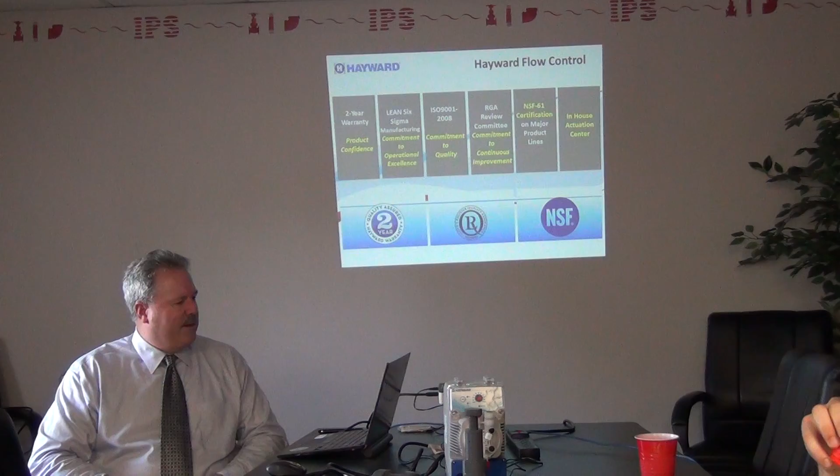We do Lean Six Sigma manufacturing, and if you've ever been involved or heard about that, it's basically all continuous improvement. It's always ways to improve your processes. We're ISO 9001 certified. If there is an RGA, something goes out wrong, it gets reviewed. Why did it come back? If it was a problem because of the product itself, then we try to figure out what happened and try to improve it. And we have a pretty lengthy process. Six Sigma is a very lengthy process.

I've been involved in the actual manufacturing of a new product. A new product takes years to develop, because we actually go back to input from the end user, engineers, and then we put all the stuff out there. All the competitors, we ask, what do you like about the stuff, what don't you like about it, and that's how we actually start making our new products.

We don't just decide, I think if we do this, it's going to be better. We actually go out in the field and try to find out, what are the customers looking for? What are the engineers looking for? Because they're obviously the ones specifying the product. So we want to make sure that we're basically scratching where they're itching. A lot of our products are NSF 61 certified.

Potable water, every once in a while you might run into that. Somebody says, is it NSF approved? Well, actually, if you open up our industrial product guide, it shows which items are NSF approved right in the second page. But you can call me up, I'll let you know.

And then we have our own in-house actuation, and I'll show one of the actuators we have here. Anybody sold actuation of any type in the past? Mm-hmm. Okay. Whose actuation do you guys sell currently? On the PVC, we're really not stuck to anybody right now. Okay. Most everybody uses somebody else's actuator. Nobody really is making their own actuator themselves. They buy it from another manufacturer, and they basically adapt it to their valves.

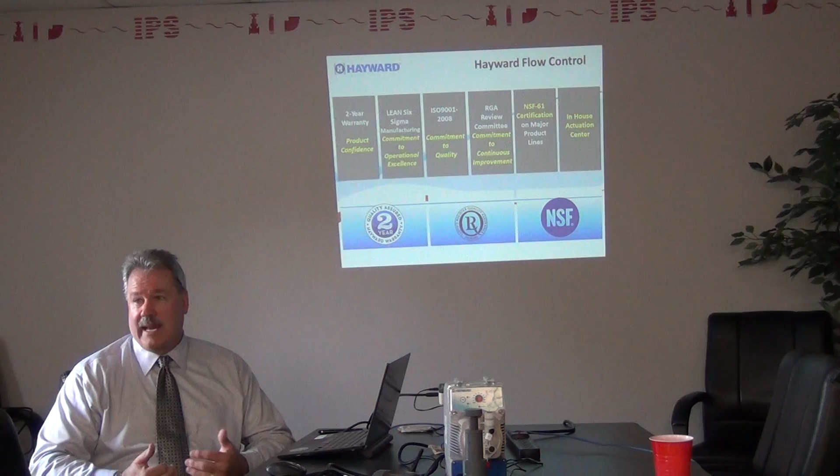And we're no different. We buy them out, except we do have a pneumatic line that actually is our own in-house actuation, but most everything else is bought out. Is that ASCO that usually does it for you guys? No, actually, there's a company called Promation that is one of our actuators, an electric actuator. We have a company called Habonim, which is an Israeli manufacturer. We use their actuators and build them at our place. They're great actuators. So those are the two primary ones: the Promation line and the Habonim line.

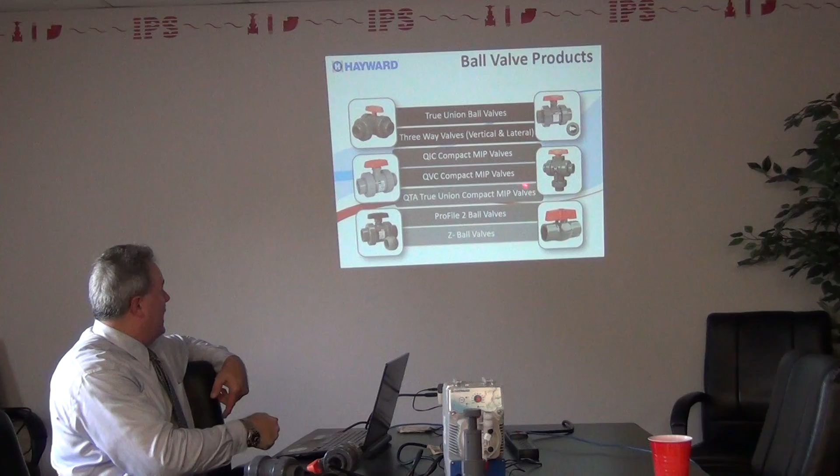Okay, you're probably all familiar with the ball valves here. Before I get into that, we have these two items here, this QVC and the QTA. If you're not familiar with that series, those are the only few that are actually made offshore. Because we have to compete sometimes with people that are bringing stuff in from overseas, or you guys have to compete with people that are bringing things from overseas. And they need a very, very cheap valve.

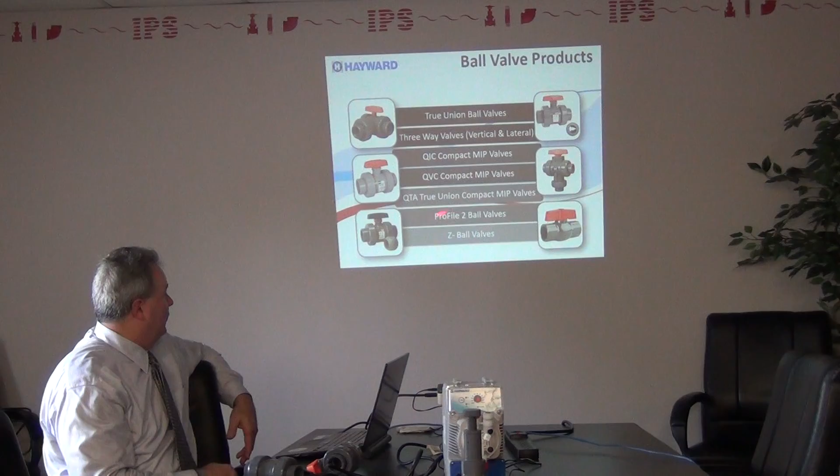Now that's not something I want to try to sell or promote, but you guys need to be aware of it. We actually do have a very inexpensive product line for those people that are using it for water. I wouldn't use it for chemicals or things like that, but if somebody's got an irrigation line and they just need something really cheap, that's where you can go. Those two series right there. Outside of that, everything else is made in the United States.

Our proportional control, this is called a Profile 2. The difference in this valve versus your regular true union ball valve is this profiled ball inside there. A lot of times people have to use a needle valve or a diaphragm valve to turn things down to get a fine flow. This allows somebody to do this, but with a quarter turn valve.

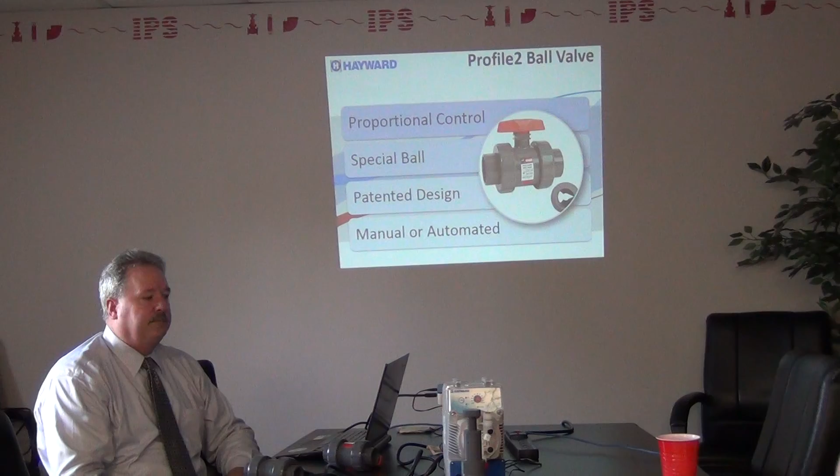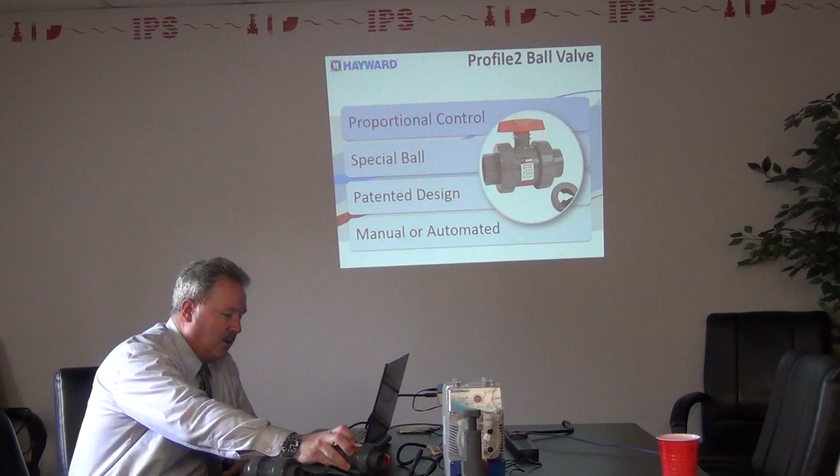So when you go to actuation, if somebody wants to actuate a diaphragm valve, you have to get this multi-turn actuator. It's like $10,000 just for the actuator itself. So this is a lot less expensive, and if they don't need really super fine control, these valves actually work very nicely for those applications. What size is that? It goes to 2-inch. Is it like a V port almost? Yeah, you can see it's right there. That's what it looks like. So again, just like these valves here, the only thing that's different is the ball itself.

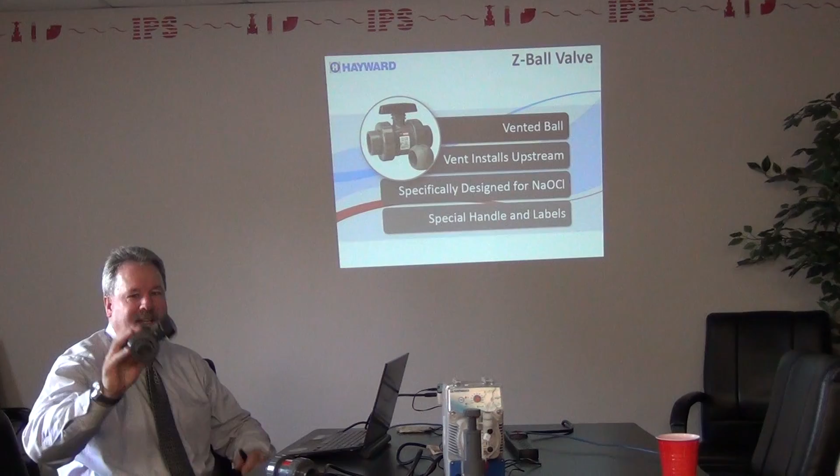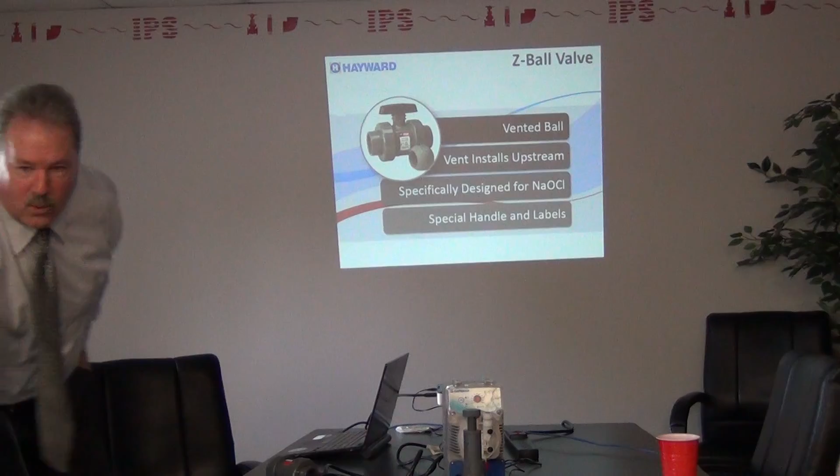Now this is the same valve as this, with the exception that it's got a different colored handle. And the reason why is because of that little hole. You can't really see it very well, but there's a hole that's drilled, and if you pass it around, you can see that hole in there. That hole is for people using sodium hypochlorite bleach applications. Anybody that's using bleach should be using that valve.

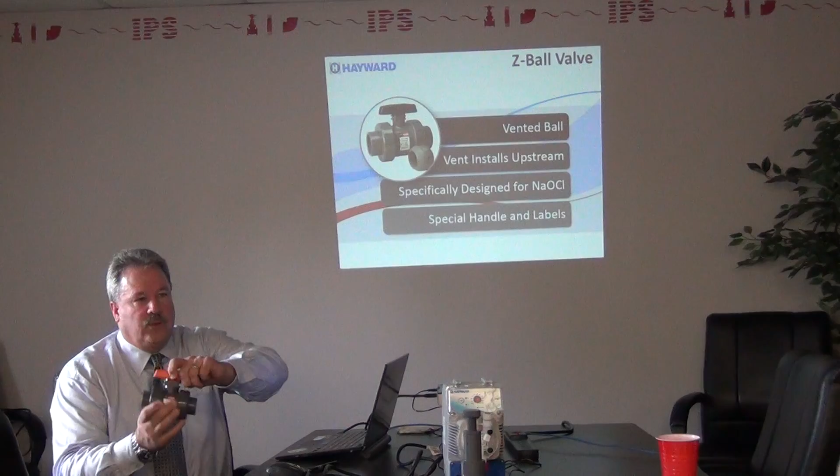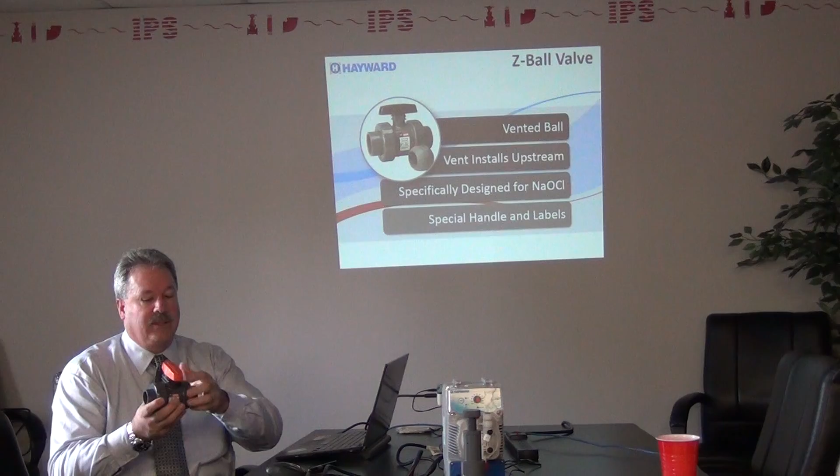They shouldn't be using a regular ball valve, because the problem with a regular ball valve is that if you close the valve and let it sit there for a period of time, especially if it's hot outside, it outgasses, and then you can't turn that handle. People end up breaking the handles. They basically have to take the whole ball out and shut down their line and everything. That hole allows enough room so that won't happen.

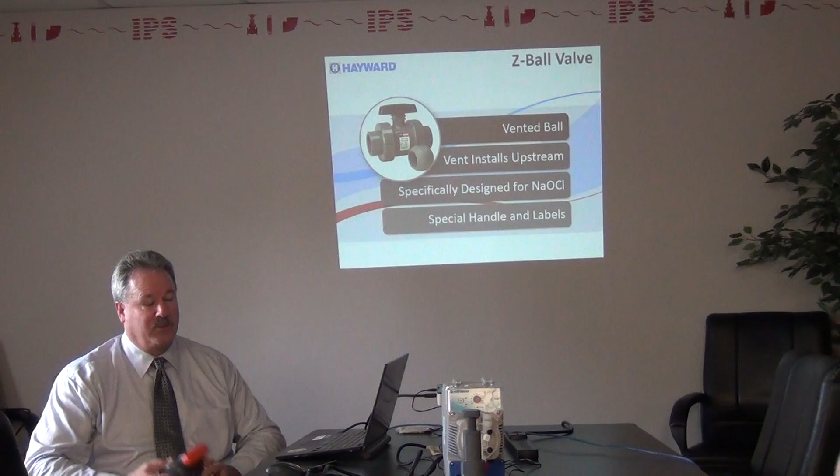So we sell a lot of those to wastewater treatment plants that are being built today. Along with our basket strainers, that's probably the second biggest thing we're selling, for sodium hypochlorite applications. And this is one of those profile valves right there.

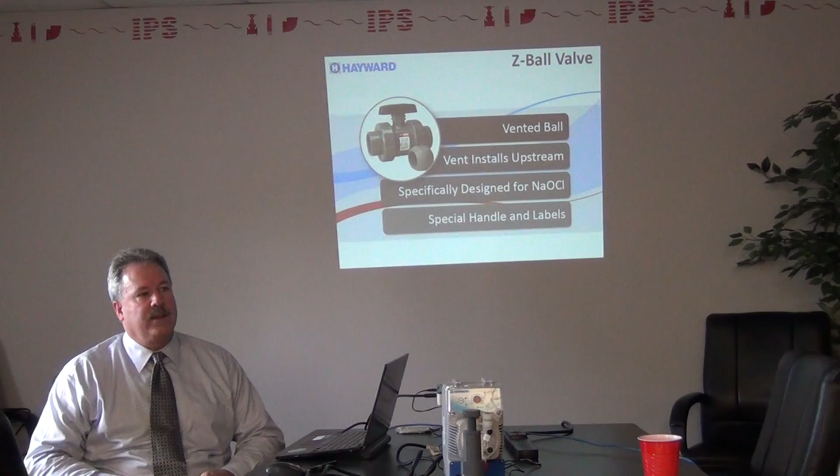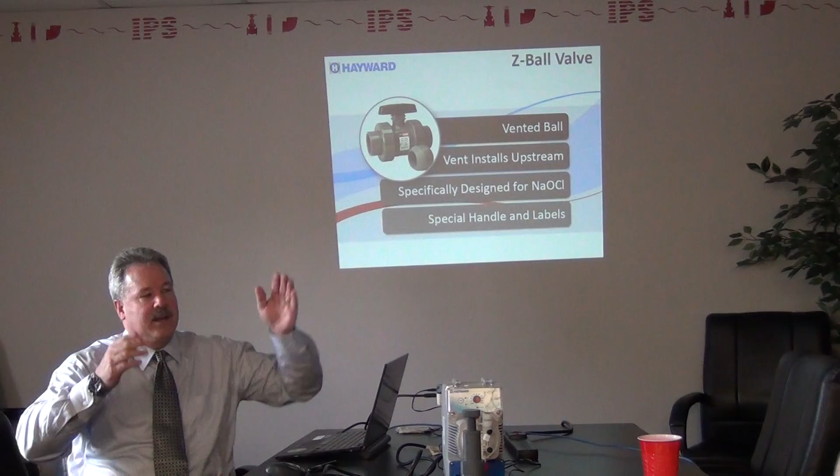So the Profile 2 has the V port, and the Z has the vent. Exactly. It's just got the drilled ball. In essence, that true union ball valve becomes a one-way ball valve, because you should always have that drilled ball on the upstream side of wherever your liquid is being closed down on. So if you've got a tank here and your valve's here, that ball should be on this side of it, so that it always has that ability when you shut that valve off that the outgassing will be on.

And one of the biggest problems I've seen is people putting them in backwards. They'll go, oh, this valve isn't working right. I'm having this leaking through problem. I'm going, you got it turned around the wrong direction. So. Close it.

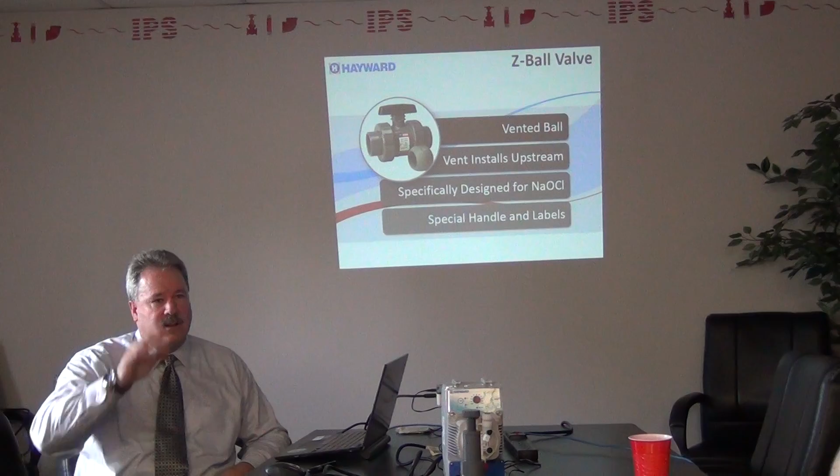And that's another nice thing about that valve is that with the vented valves you can see that. I mean, you walk through a line, you can see the guy's got a vented valve. There are other people, Asahi for instance, they'll drill a ball, but they don't show it. You can't tell the vented one from a non-vented one. The handles are the same, everything's the same. They just drill the ball.

Butterfly valves, I won't get into this. Again, this could be a whole separate meeting, but we have a new butterfly valve that's been out for about 1.5 years. It's called our BYV. It replaces our BY valve. We still have the BY available, but it's being phased out just because this valve is a much better valve. Again, went back to the engineers, the end users, developed this. Real quickly, the key points on this thing are that it's got ISO 5211 mount on the top, so somebody could use their own actuators and actuate this valve if they wanted.

Almost everybody's valves nowadays are going to this ISO 5211 style mounting, so they can use their own actuators. This has 19 positions it can stop. Most butterfly valves have 9 or 10. This has 19. You can lock it out, you can tag it out. It's actually an excellent valve. And another time I'll go through the pluses of this thing over the competition.

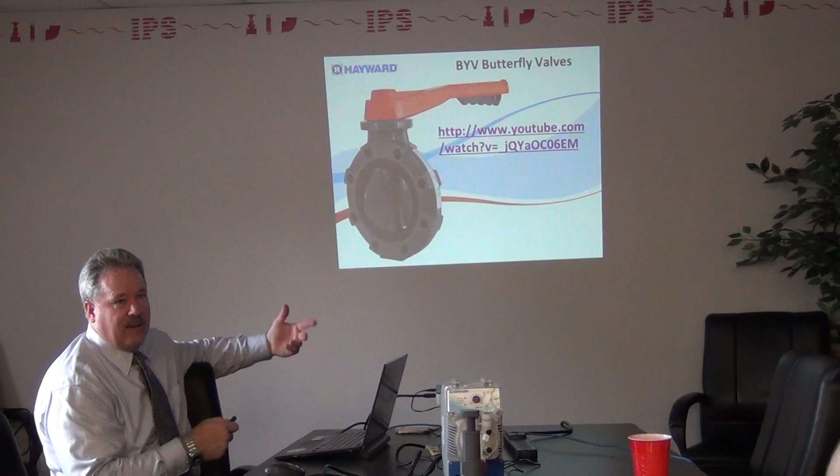The other thing it has is places, like everybody pretty much tags their valves. There's holes right here where somebody can put their tags to. That's where you put a lock or, just think about a cable tie. A metal cable tie goes through that so that people can't move it if they get it in the position they want.

Okay, unique to us is some of these products right here. We got our pressure relief valves, which are these. There's a little plug on the end, and in that plug, you don't have to use a gauge, but a lot of times people will put a gauge in there so they can basically set it to what they want. Problem with most other people's pressure relief valves, they have to put a T and then put a gauge. That's actually built into it. That's pretty cool. Yeah, and so it regulates everything that's upstream. That's what a pressure relief valve does.

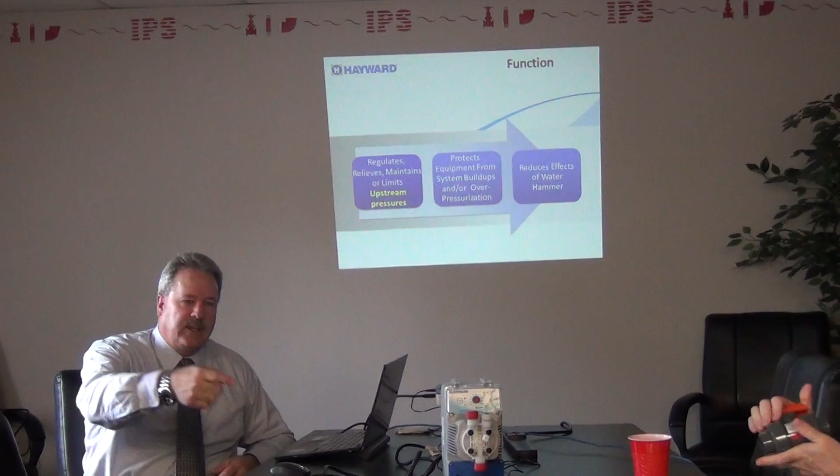Conversely, your regulator, think of it as the stuff in your house. You're trying to protect all your sinks and the faucets in the house. That's what a regulator is for, everything downstream. So that's okay for continuous bypass? The relief valve, yes. And that's called a lot of different things. Bypass valve, pressure bypass valve. I've heard a lot of different things. That one almost has 5 different names, whereas the regulator is a regulator.

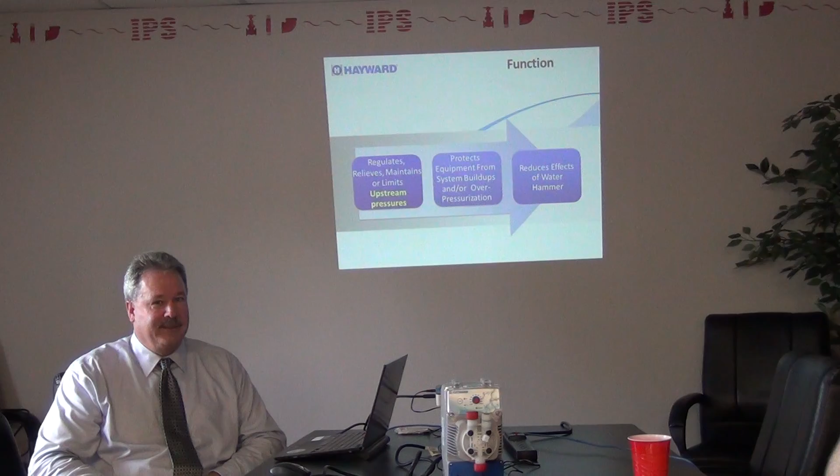Now, is that good for different pressures, there's different springs? Yeah, in fact, let me just do something here. I cut a lot of slides out of there. We'll push the springs. Okay. Oh, I'll just do this.

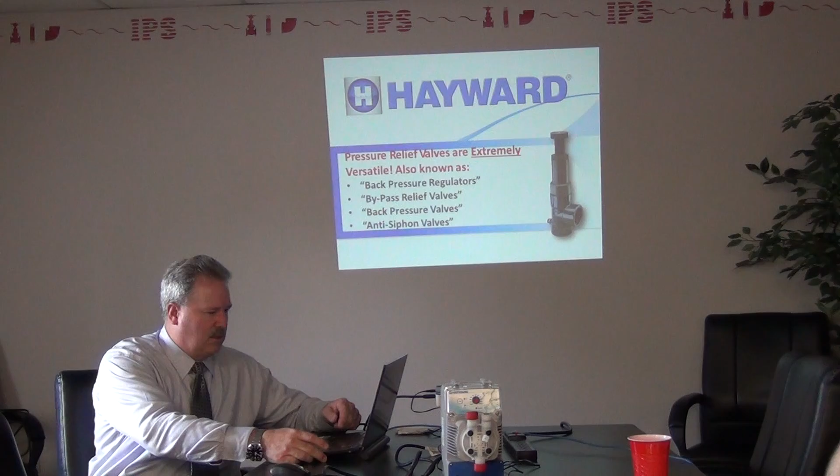It's known as back pressure regulator, bypass relief valve, back pressure valve, anti-siphon valve. A relief valve is known by a lot of different names. But to answer your question, oh, I guess it doesn't have it. Anyway, yes, it has different springs for your regulator. From like 0 to 10. Yeah, exactly. For your low side or your high side.

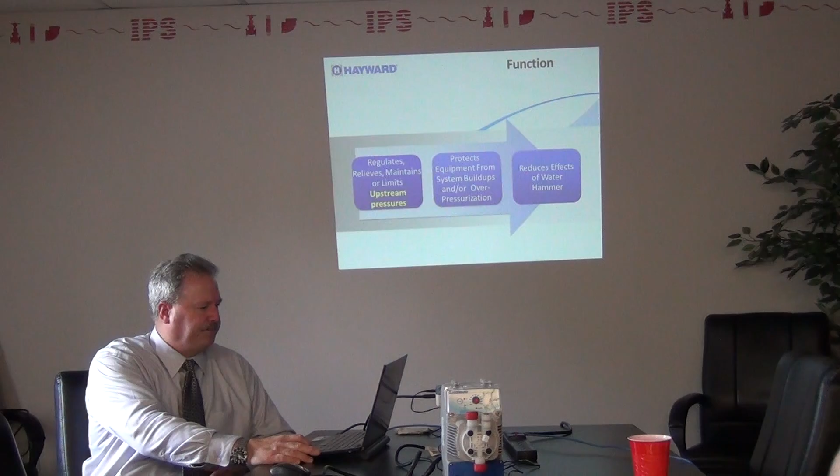And again, we can talk about different applications. I got all sorts of slides on different applications for these things in case you guys ever wanted to talk about that more specifically. Regulators, same thing.

All right, now the solenoid valve. You guys might have ASCO or somebody else like that, but this is our solenoid valve. That actually comes in really handy when you're using a chemical. Not for water. People using water, you may as well use a brass valve or something like that. But if somebody has a chemical of some sort, and we sell a lot of those solenoid valves, I was very surprised to learn how many Hayward does sell of those. And in my area, we sell a lot of them as well. It's just quick on-off. It's just instantaneous on, instantaneous off. It comes in 120 volt, 24 volt, 12 volt. You can get different coils for it.

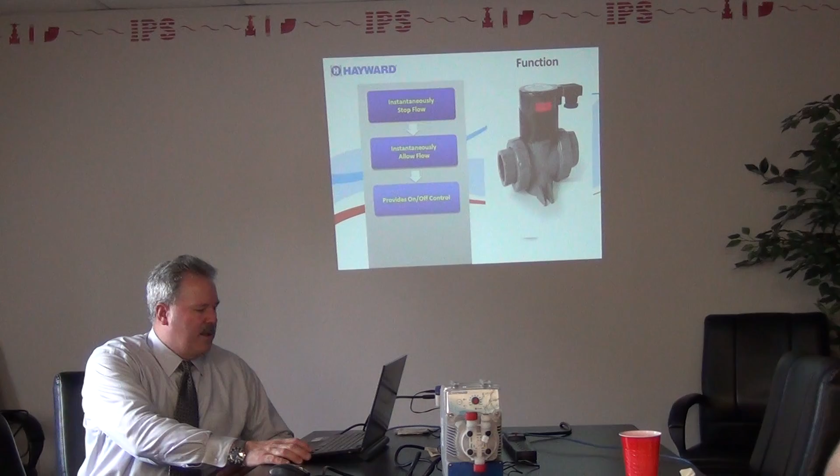Can you use those in chlorinated water applications? It depends. Is it mostly water with a little bit of chlorine, or is it almost all chlorine? Do you know? No. Okay. But yeah, they have been used in them. We have CPVC and PVC, so I'd probably be using the CPVC if I was in that application.

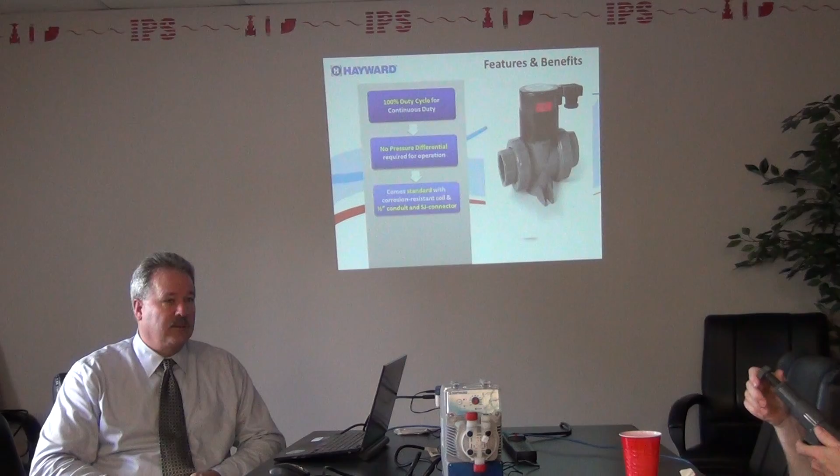Okay. Something else I'll just make mention of. You mentioned the basket strainers. That's our SB series. We also have our duplex, and that's used a lot in the water treatment areas. But we have lateral 3-way ball valves. The regular type have the bottom ports down here. The laterals are out to the side. It's like a T that's turned sideways. So it's a good valve. We sell a lot of those.

LHB series. That's basically an actuator that goes on top of your valve. Like you can take the handle off this, put the actuator on top, but it's a manual. You put the handle on top of that and turn it, and when it turns, it sends a signal to a computer to say that valve's either open or closed. So somebody that might not need an electric actuator or pneumatic actuator, but just needs to know whether a valve is open or closed, this works on both a butterfly valve and a ball valve.

And we sell a lot of those as well. Because every once in a while you run into situations where the guy goes, I don't need an actuator, but I need to know whether that thing's open or closed. I don't want to have to send a guy out there to find out if it's open or closed.

Yeah. And then we have the wafer check valve, which is, where did it go? Right for you, Lisa, that one. That's also a newer product. We have ball check valves, and then this wafer check valve, you can get with a spring or without a spring, but basically it takes up less space if it needs to go between flanges. It's another product.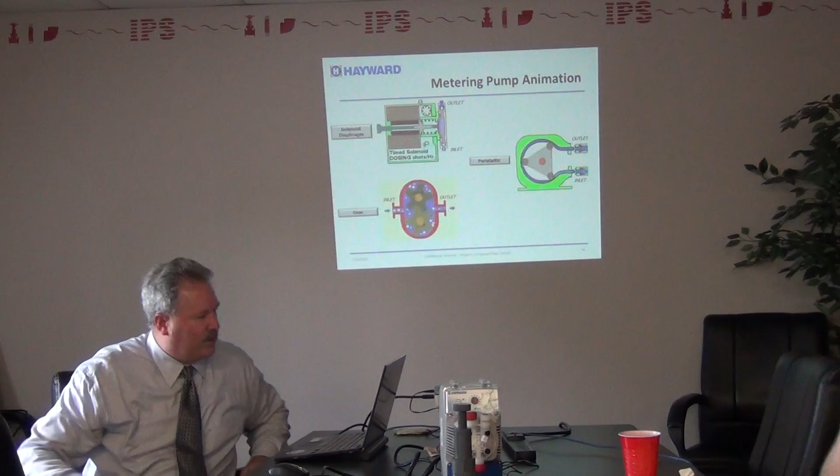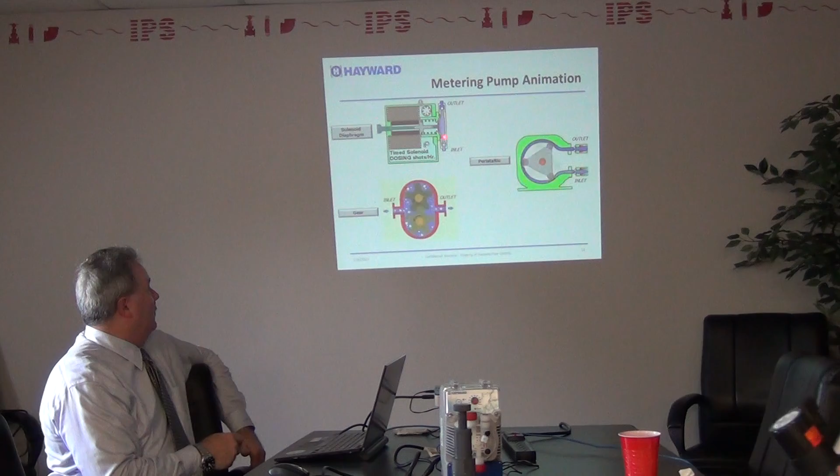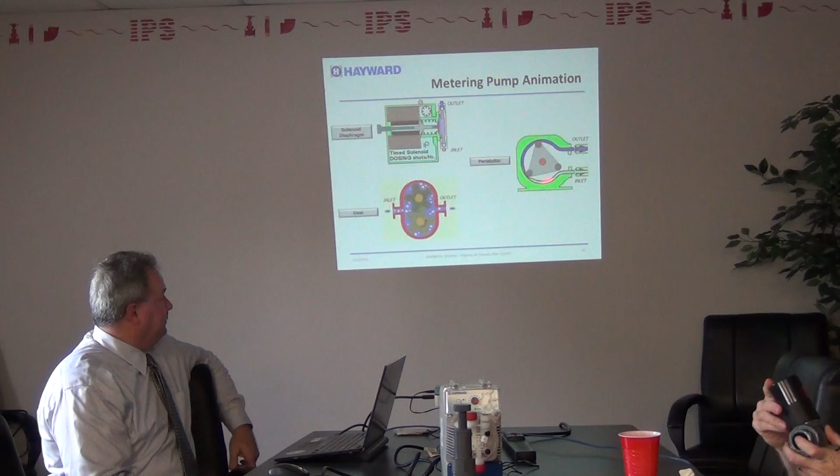So this is called a solenoid driven pump. Ours goes like this. It pushes against the diaphragm right here, and when it pushes against it, it sucks liquid up and then pushes it out. You have gear metering pumps. That's what it looks like. And you have a peristaltic, they call them tubing pumps. It just basically rolls the liquid along. It's a pretty simple concept. But again, ours is actually solenoid driven.

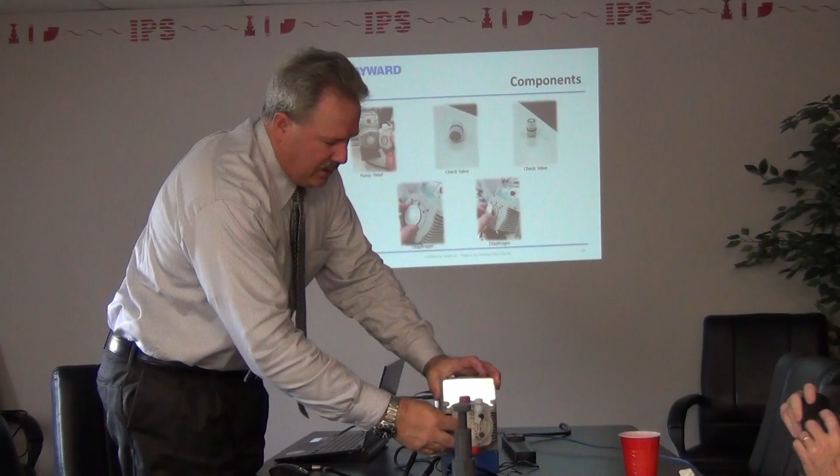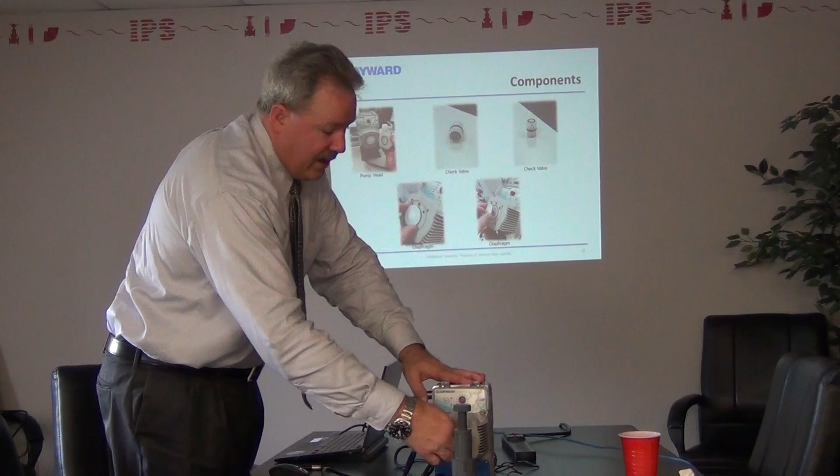Very simple components. You got a diaphragm inside the pump head here. And then of course you got the solenoid that pushes that diaphragm. This is your inlet, this is your outlet. This is kind of like that venting ball valve. This is the degassing valve right here. It's also kind of an assist for priming. So somebody's starting the pump up, you just open the valve, let some air out while it's priming, and then you just close it down and got a nice prime.

And all of these have double ball check valves on them, and they're cartridge style. Everybody else's metering pump, you have to either buy a ball separately, an O-ring separately, and fool around with that. And if anybody's ever tried to handle those stupid little balls, they fall out of your hand. If you're unfortunate enough to be in a waste treatment area, you watch that go into a tank somewhere, roll down the drain. Yeah, it's crazy how difficult it is just to fix a check valve.

But ours are actually cartridge. They all look like this. It has an arrow, so it shows which direction the liquid's supposed to go. And you can see there's 1, 2, 3. There are 3 different areas where you have check valves.

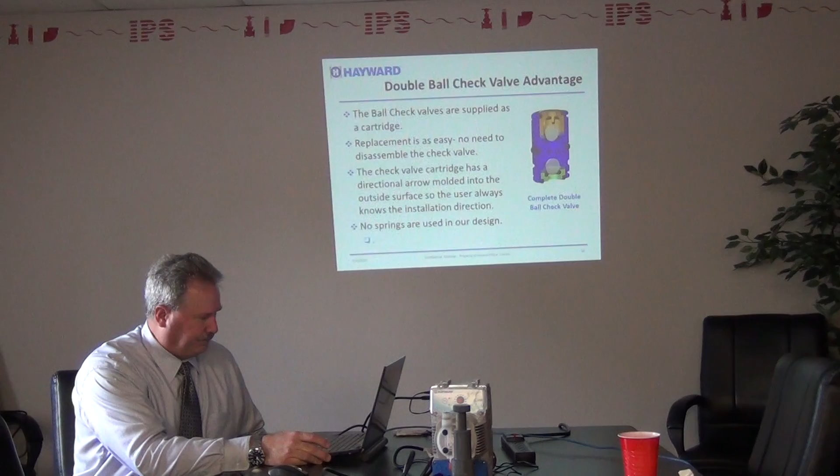And again, just double check valve. It comes standard with the pump. Actually, here's some of the other components. I want to throw them all out there, but this is actually a foot valve that goes into your chemical tank or whatever you're going to be pumping out of. It's got a check valve on the bottom, and it's basically a foot valve is what it is.

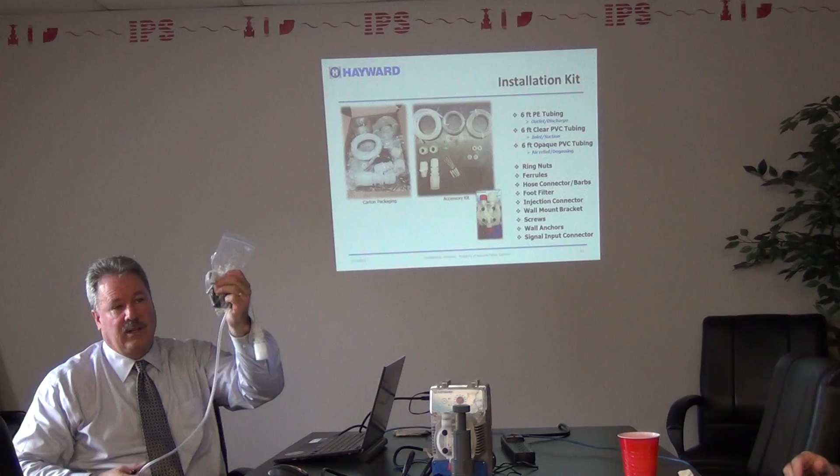Then if somebody has to inject into a pressurized line, let's say a golf course, and they're fertilizing their golf course, and they inject fertilizer into a pressurized line, then you need to have what comes standard with it too. It's one of these. It's an injection valve. So basically, it doesn't allow anything to come back, but it allows the pump to pump it into the line. So this all comes standard with it.

The thing that's really nice about this pump is that it only comes in PVDF and Teflon. That's it. You can get it with Viton O-rings or you can get it with EPDM O-rings, but all you have to do is one chemical resistance check. We can compete with the PVC. We can compete with the Polypro. Obviously the PVDF. We've been able to manufacture it less expensively enough so that we can compete in that marketplace.

There's only one pump we can't get down low enough to, and that's called an Iwaki Walchem. It's a Japanese pump. They call it their EZ series, and it's like $100, $125 a pump. We can't get down that low. But probably 95% of the applications that are out there are not those type of applications.

So the nice thing about this as a distributor is we have 3 different models, and that's it. And almost every one of them has exactly the same footprint. So it doesn't take up much room on somebody's shelf. There's only 3 different types. And it makes it very easy to sell, because one of the hard parts as a distributor, if you're selling a metering pump, there's a lot of different configurations somebody can buy. They can get a PVC with this motor, a glass-filled polypro with this motor, or a solid polypro with this motor, a PVDF with this motor.

I mean, like LMI, for instance. There's like 2,000 different variations that somebody can get. Somebody can say, well, that's good, isn't it? It's like, not really. It makes it really difficult as a distributor to try to stock the stuff, to keep it so you can sell it. So anyway, from a price standpoint, we can compete with everybody that's out there with a PVDF pump head. You can have a 4 to 20 milliamp. There's a lot of different options for this, and we'll get into this a little bit. But again, it simplifies the selling of it.

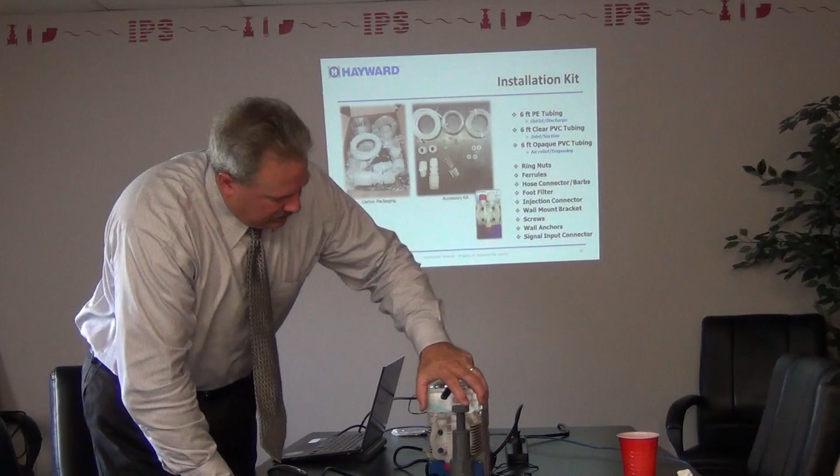This. That should have been screwed in anyway. Never mind. I was just going to show you can change the speeds.

But basically, this is the only thing. You're not having to mess around with the stroke length. And why that's important is with the stroke length, just think of it this way. The longer that thing strokes, the more flex on the diaphragm. So your diaphragms don't last very long, whereas this actually has a 5-year guarantee on the diaphragm. So somebody won't have to replace their diaphragm for 5 years, and maybe not even that, depending on how often they use it.

It's Teflon, it only strokes so far, it's controlled. That's why people like LMI can't really say how long their diaphragms are going to last, because it just depends on how somebody uses it. It depends on if they're using 100% stroke length or a 25% stroke length. So again, it's an advantage that we have over the other guys.

Our flow rates are basically from 1 gallon per hour to 14 gallons per hour. And that represents about 95% of the applications that are used for solenoid-driven metering pumps. We have what I call our Series 100, Series 200, and Series 500. You can see the 100 goes from 1 gallon per hour to 2, and then the other one from 2 to 4, and basically from 5 to 14.

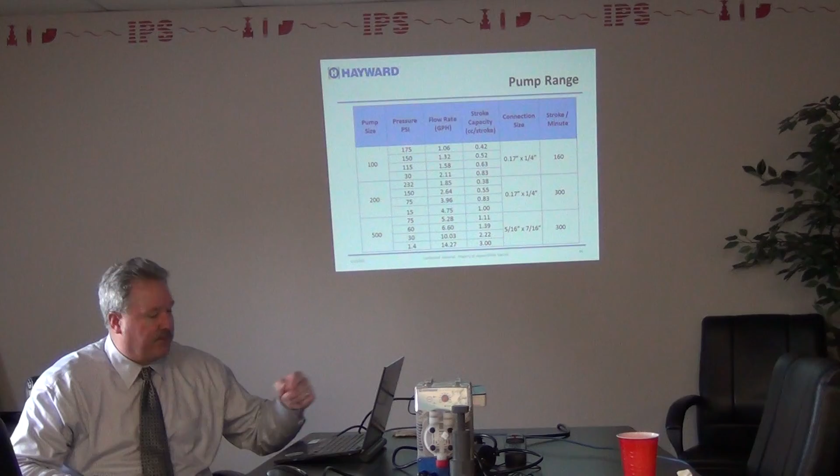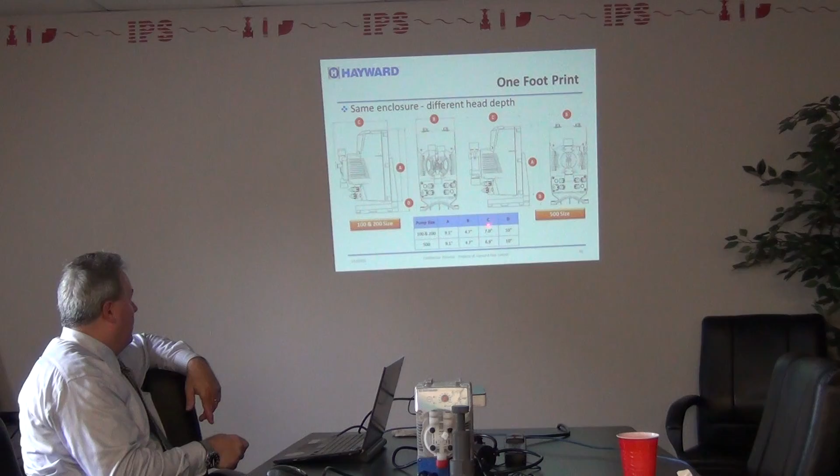Yeah, we talked about that PVDF pump head. Let's see if there's anything on that worthwhile talking about. The only thing that's worth showing here is just the fact that if you look at the dimensions of all these pumps, the only thing that's just a little bit different is that C dimension, which is this one. So the funny part is that the smaller pumps actually are a little bit longer, but that's because we have the degassing valve on the front, whereas the other one's on the side. So the larger one's not larger in size, it's just that the degassing valve's on the side, not on front.

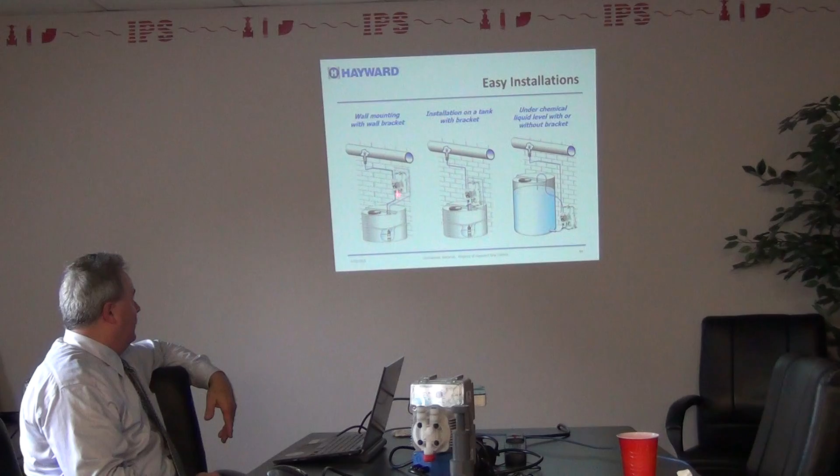Different ways you hook up these pumps: either on a wall, on top of a pump, or on top of a tank, or down below. We have both models. This is an analog model because you can actually do this manually. We also have digital models that are exactly the same, just one's available as an analog, one's available as a digital.

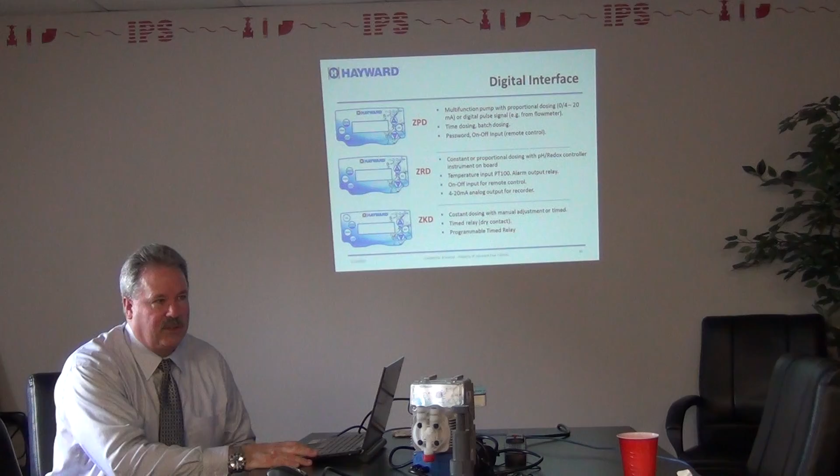And then you can either get a multi-function. You can take signals coming in to control the pump. You can just have it dose a certain amount, however you want to set it up. Three different types of dosing. And again, if you get an application, just call me up and we'll figure out which pump would work best for you. It has the UL listings, CSA listings, and then European listings. Okay. Any questions as far as the metering pump?

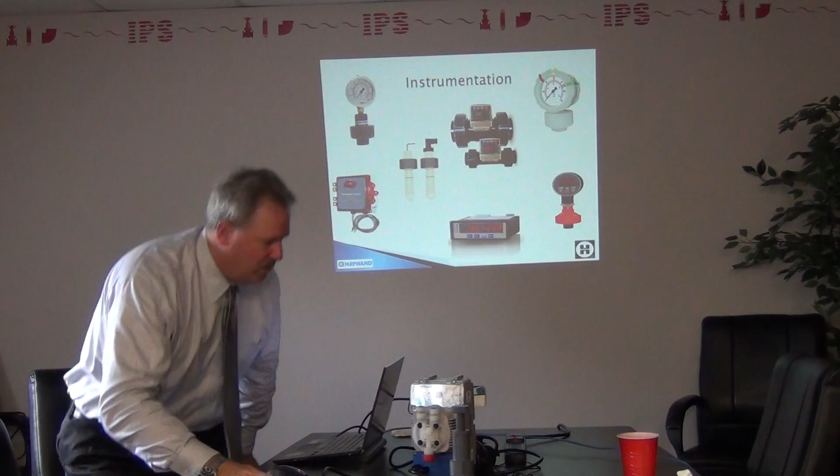Okay. Instrumentation. This is another new line that we've taken. And we're trying to compete with people like George Fischer, Signet that's out there. We have a paddle wheel, which is right here. One of the things that's nice about this particular one is you can get this with or without this on top here. Basically, the top works here. This can send a 4 to 20 milliamp signal somewhere else, or actually can have a couple different relays on this thing. And it tells somebody the flow.

If you set this thing up, you see it has green and red. Basically, it'll show somebody right there whether it's in a red condition or a green condition, and it shows you the flow, gives you the total. It totalizes. You can reset it. This is all again PVDF. This is a Teflon paddle wheel, and this Teflon paddle wheel has 5 paddles on it versus George Fischer has 4. And the reason why that's important is that this actually gives you 1 extra, it's like 20% more accuracy than the George Fischer one.

So, in addition to that, with GF, to get the low flow, kind of like we were talking about those springs, on the low end of a paddle wheel they actually have to use a separate paddle wheel altogether. Basically one from 0.3 to 20 foot per second, or they have to use one that's 1 to 20 foot per second. This one actually will go from 0.33 to 26 foot per second. Oops, get back there, sorry.

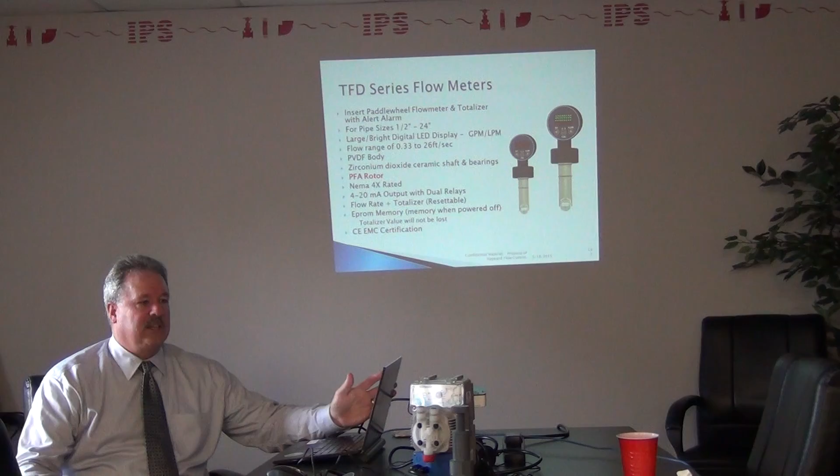And the other thing that this allows is, first of all, if you wanted to, you could take one from Signet and put that one in. It actually fits into their tee and everything, but we of course have our own installation tees as well. But the one thing that is different from GF that they don't have is this right here. This is also a paddle wheel, but this has a TopWorks on it as well. So with GF, you actually have to have a paddle wheel, a tee, and then actually a meter somewhere else. So this gives you all in one as well.

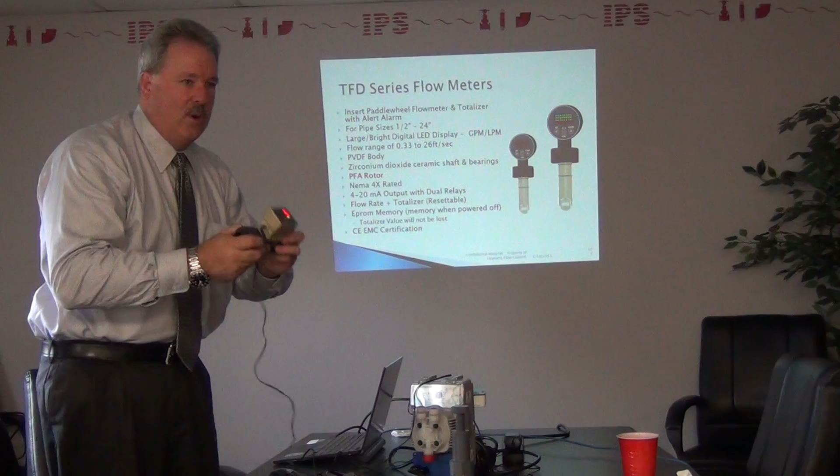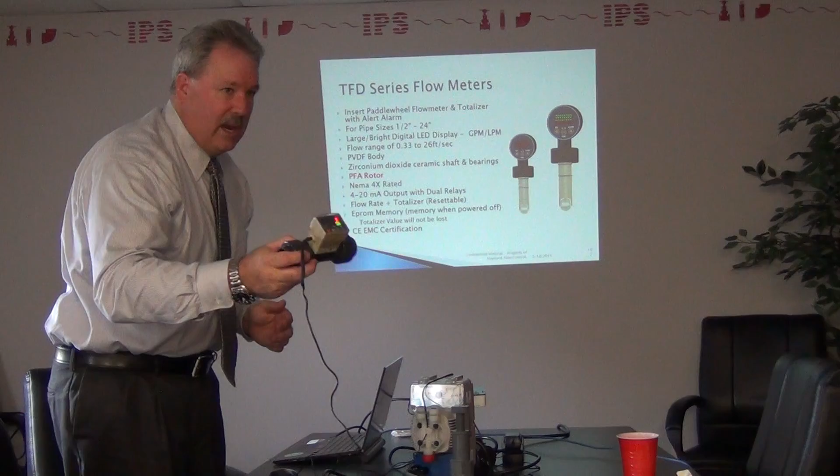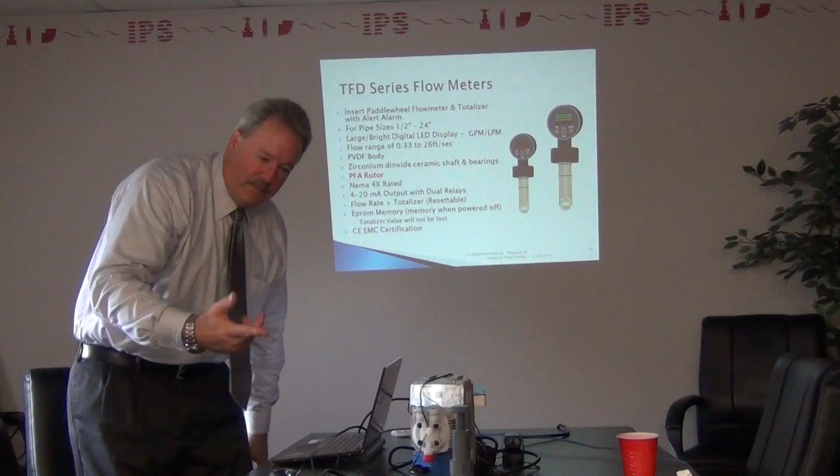GF can get one like this as well, but it costs a lot more and there's a lot more to it. This is a very simple inline one. Nobody has to mess around with K-factors, which is how many pulses there are. It comes standard already as a part of this unit, so you wouldn't have to mess around with it at all. Available in polypro, CPVC, PVC.

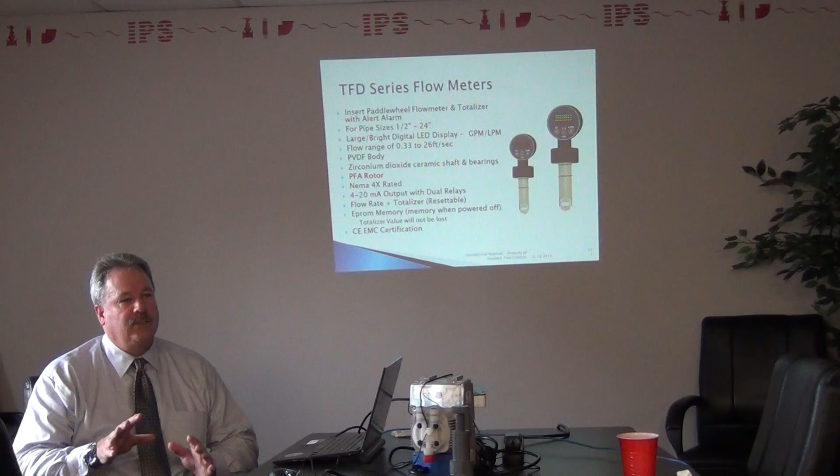And that also has outputs on it? Yes, it has outputs. In fact, almost all these operate exactly the same as far as how you actually calibrate them and everything. So, as far as setting them up, kind of pass through some of those gauges that are sitting in front of you.

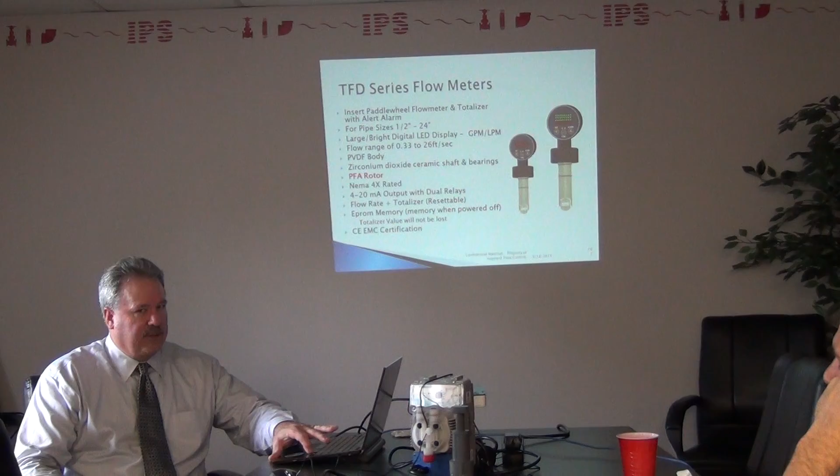These are also relatively new. The ones that are there with the little green, red, and yellow, it's kind of a simple little design. That's a double-sided gauge. Where those are used, a lot of filtration. You guys sell any filtration, like cartridge filters or bag filters or things like that?

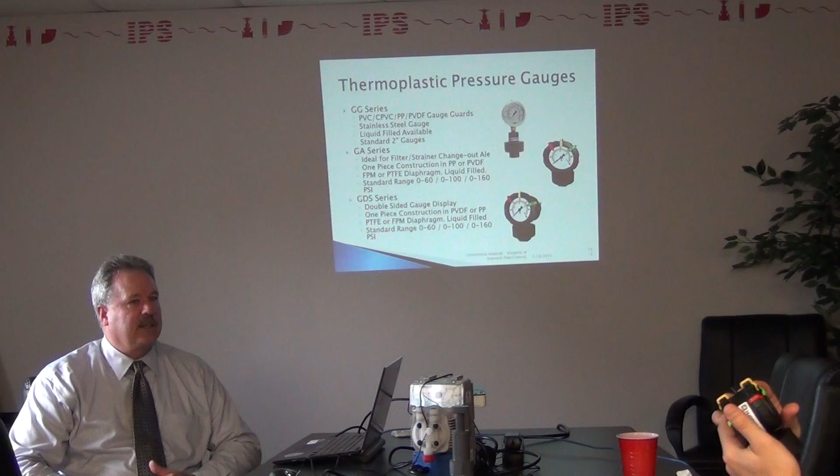Yeah. Well, every one of those guys are going to use some kind of a gauge of some sort because they need to know when to change out their bag or their cartridges. And the way they do that is by pressure differential. They say when it gets to this much pressure, we need to clean these vessels out. So they'll put a gauge on top of it or somewhere in that line to tell them when they need to actually replace it out.

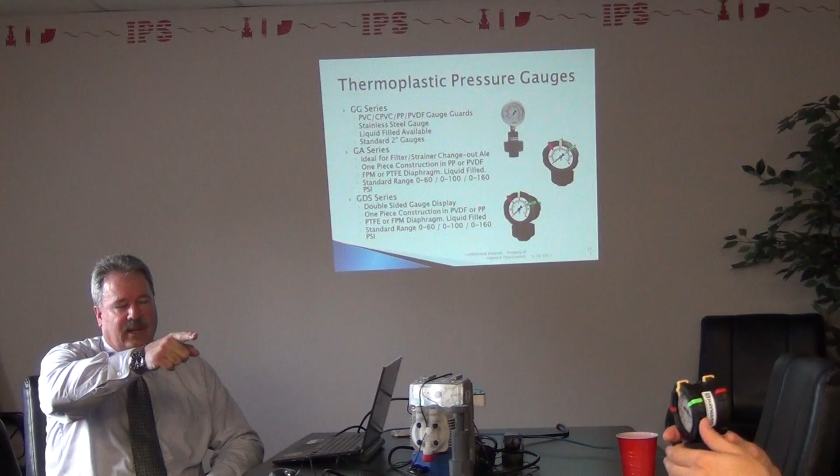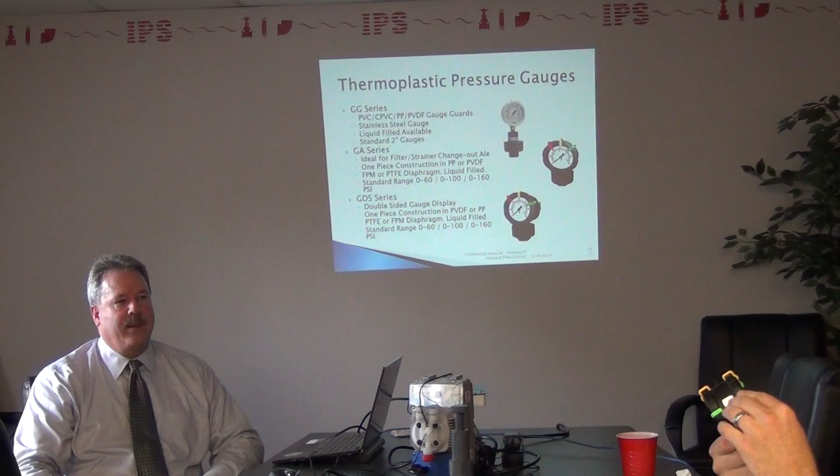This is kind of neat because it's so simple. It's kind of silly. You can take those off if you want. You pull them off. Somebody could just leave what they want on there and say, okay, when it hits this little red thing here... Broke it. No, you didn't break it. When it hits that red thing there, time to change out. Instead of having the red, like a stop light, they can just use one of those. Or sometimes they have an arrow drawn. Yeah, exactly. Some people draw an arrow.

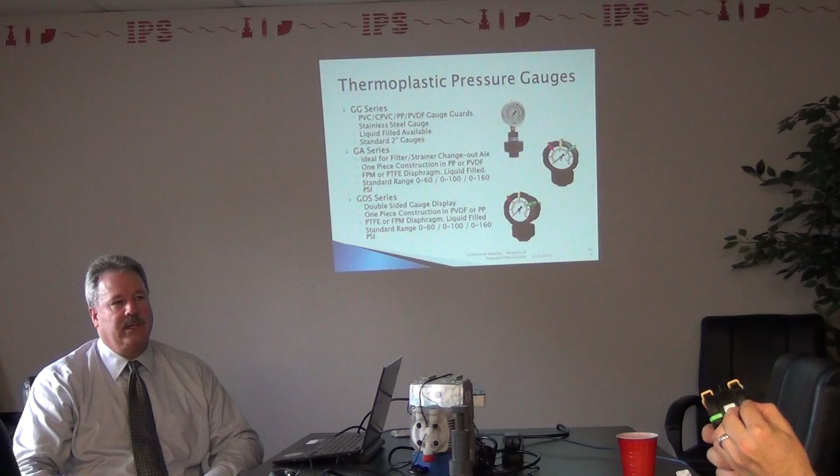So this gives a visual for somebody to use, and that other one there in front of Lisa is the same thing, but on the single side. And those are gauge guards too, by the way. Those actually protect the gauge. It's all one piece, and it's available in PVDF and polypropylene. And why would you want double face versus single face?

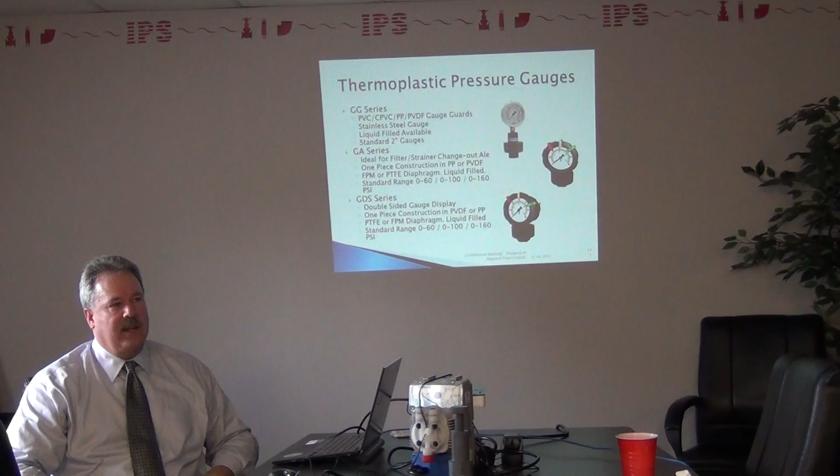Well, because let's say a guy's on a plating line, okay? Pretend these are tanks, and you got your filtration behind there, and you're on this side of that tank, and this thing's like 50 feet long or 50 yards long, and that thing's turned the other way, and you can't see what the pressure is on that side. So what happens? You got to send somebody around 50 feet to find out what it is. So that's where that kind of thing can come in handy, so somebody can see it from whichever side of a line they're on.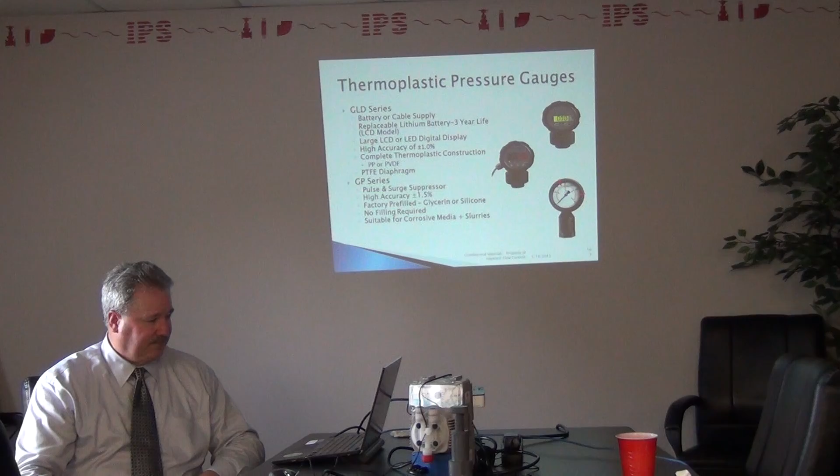I can think of a few customers that use it right offhand. It's people that build equipment, etchers and things like that. They're using it for that exact reason. We also have a battery-operated one that's around there. Yep, and that one has a 3-year battery life. So for those remote applications where they don't have power, they just want something that will show what their pressure is. This allows it as well.

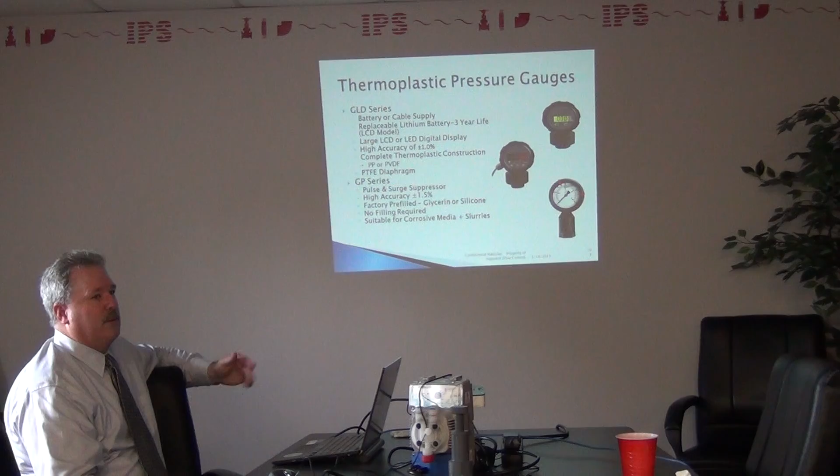There's also this one that's shown here that I don't have a sample of with me. This is kind of a neat one for applications where there's a metering pump, or if you guys sell air-operated diaphragm pumps like Wilden's, those have pulsations, and anytime there's a pulsation, the needle goes like this every time. This actually doesn't do that. This one's a surge suppressor gauge, so you don't have that needle bouncing back and forth.

Just another option. And then we also have this one there in the middle, which is actually a powered meter. And almost all of our things are 24 volt DC, by the way. That's a very common voltage for most industrial people. But just as an FYI, all of the instruments are 24 volt DC if they're powered. If it's not powered, then you don't have to worry about it.

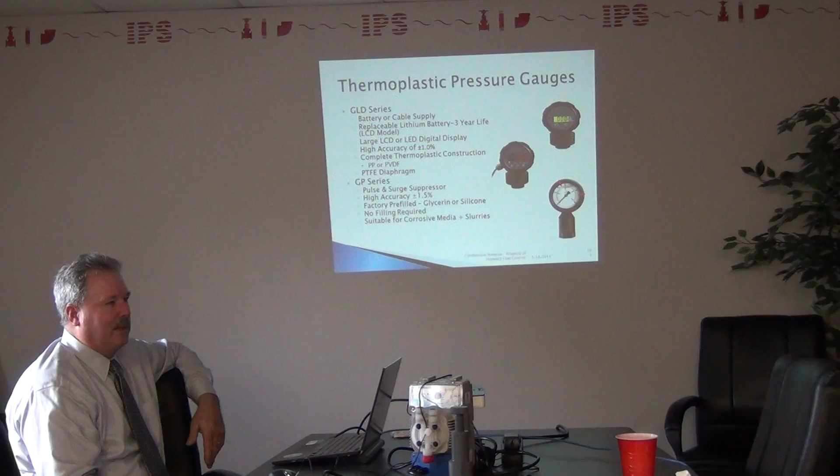Pressure alarms. This again would be something where you want to send a signal somewhere that warns somebody that, hey, this thing's exceeding the pressure. You need to get out there and change out the vessel. So again, just another option. We talked about that.

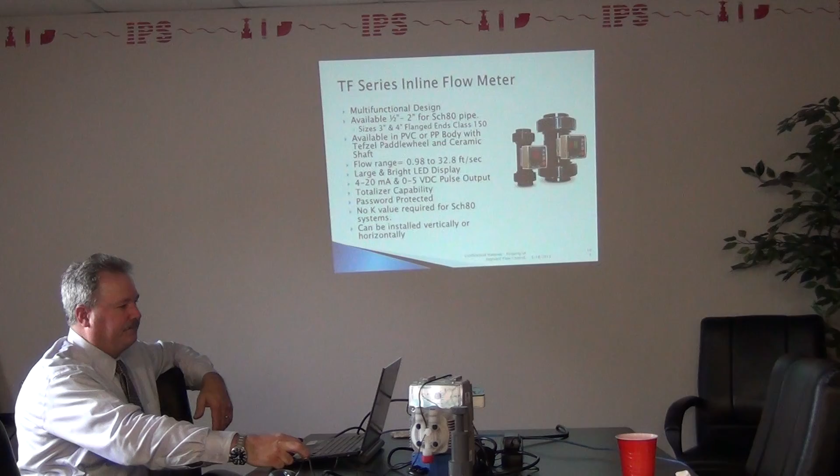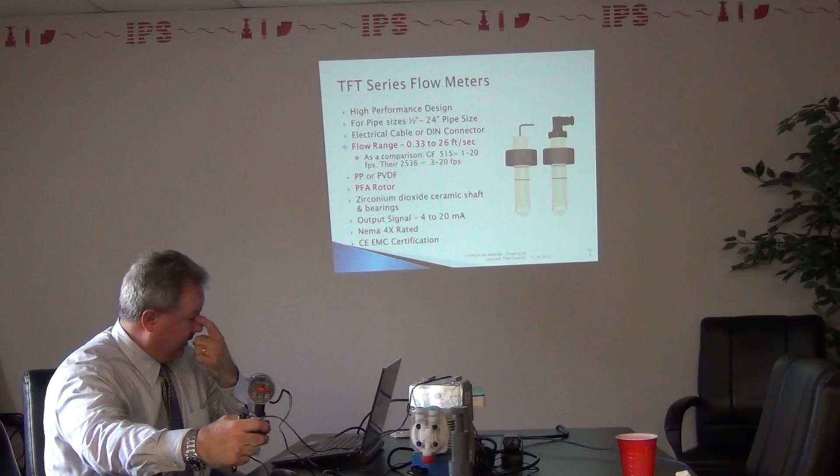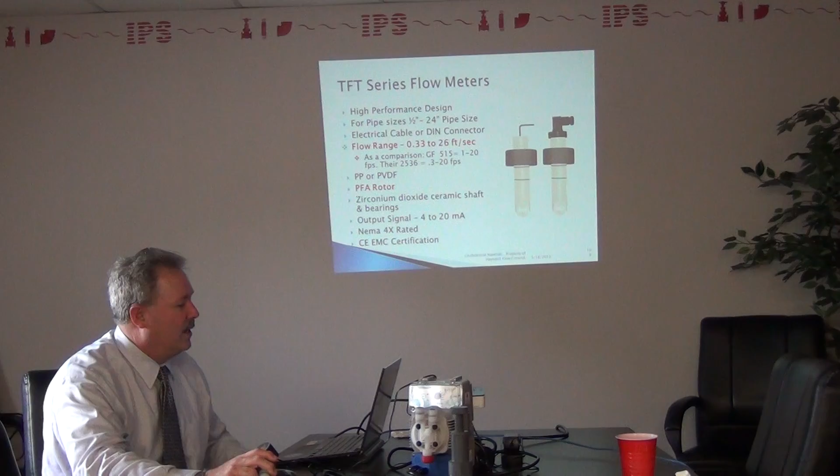Okay, so the paddle wheel that has that top mount, we also have it without the top mount, and it looks like that. Basically, it's a shielded 3-wire that goes to a computer. So why would somebody use it without this? Well, maybe they got a computer that does all the calculations. They just need to know what the pulses are. So we have it with a DIN connector or just a standard wire that goes straight to the computer. It's available either way.

We actually have level transmitters. So people that have tanks, like a tank farm, need to know how much liquid is inside their tank. A lot of people are going to what they call ultrasonic level control, and ultrasonic is a very good product. If they can use it, that's what they're going to use, because then they don't have to be invasive and put something inside the tank. But there are applications where there's foam.

There's foaming, and what else is there? There's gas. There's different things, or even just fluctuations in the liquid level that make the ultrasonic misread. So this is something that goes in the tank. It's very consistent. It doesn't matter about foam. It doesn't matter about any of that stuff. It bases everything on the weight of the liquid. So it's very easy to tell, and you can correct it for specific gravities and things like that. So another option again.

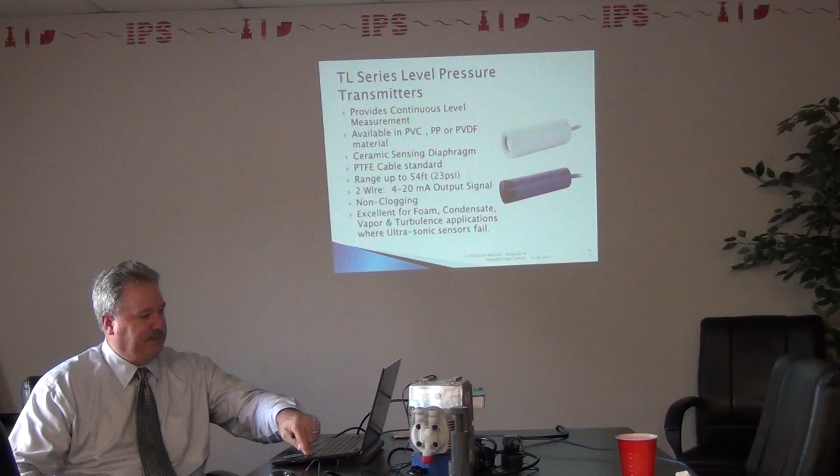So if you have people looking for something to monitor the level of their tanks, we have that. And then of course we have the displays and the controllers, so you send that signal somewhere else, show it on a display, you can send it right to your computers if you want to. Then we have an alarm system, if somebody wants a visual that there's a problem, there's an alarm. And this is an actuator with a plastic housing.

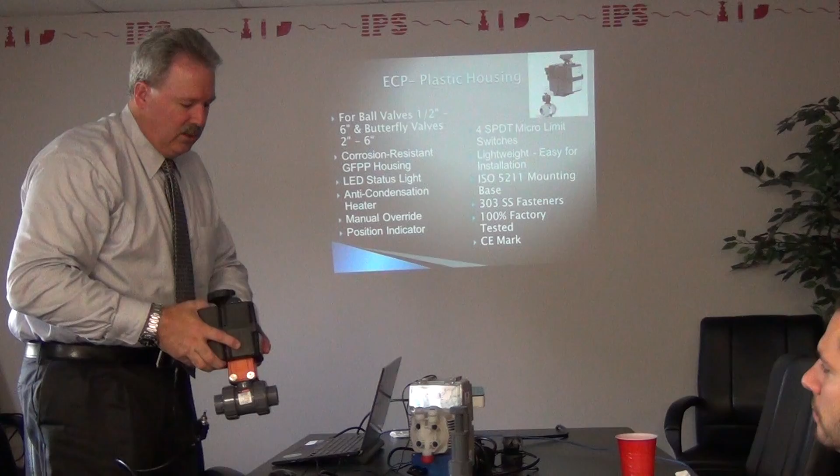So all of our other actuators are pretty much metal on the electric side of things. But this is in case somebody has a corrosive atmosphere they need to go into. This has a beacon on the top. It shows you whether the valve is open or closed. You can kind of see that line there. And why that's good is that if this valve is up here somewhere and you don't have a beacon, you can't tell whether that thing's open or closed. With this, you can actually see it from below. So it's something that the other guys don't have.

This is actually a manual override, so if the power went out for whatever reason, I can just switch this thing over and I can turn this thing. You can see how this actually will turn when I'm turning this. What else on this thing? It has a power light, it tells you whether the power is on or not as soon as I hit this.

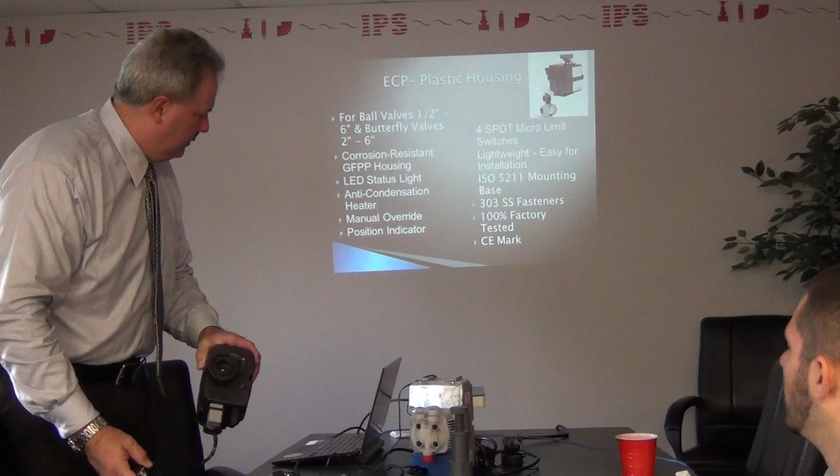Plugged in? No, it's not plugged in. That helps. Wrong plug. Oh, okay, thank you. That does help.

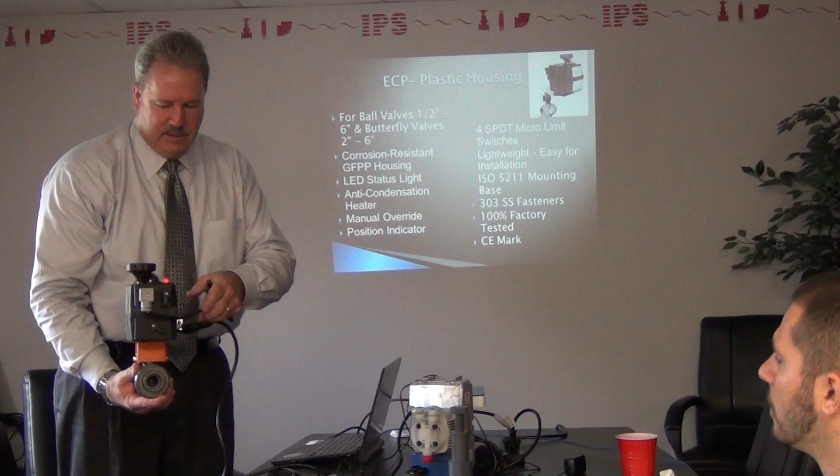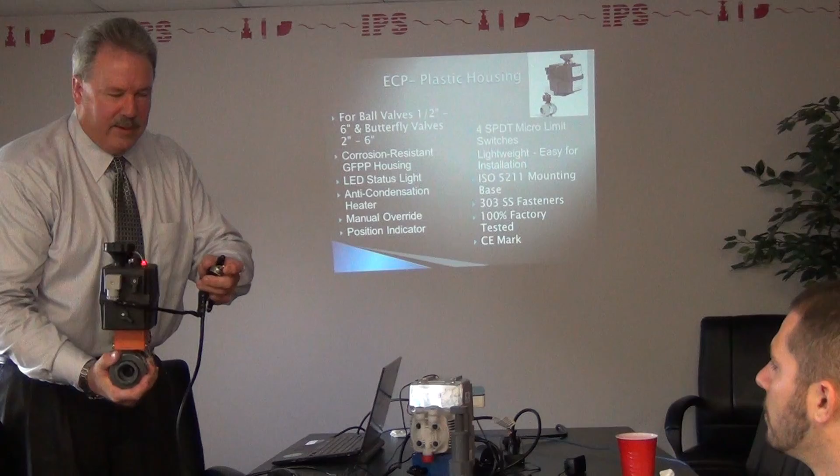And then that should be closing right now. But wow, actually it's opening. Can you guys see that at all? It takes 10 seconds. This is a 10-second actually. Does that beacon say open, close on it, or is it just where it's positioned? Let me make sure I got this thing turned on. Hold on. I think I don't have this thing right. Closing now? Should be. There we go. It is now locked in position. So now it turns the other way, and now we'll open it up.

Again, it's a very nice, inexpensive plastic actuator in case somebody needs to have their valve actuated open and closed when it's in a corrosive atmosphere. That's a good actuator for it. And then we have different sizes. It goes half through 6-inch for ball valves, and 2 to 6 inch on the butterflies. It's a 75% duty rating, which basically means if it's on for 45 seconds, it needs to be off for 15 seconds. That's a 75% duty cycle. It needs to cool down.

It's IP67, which basically means, have you heard of wash down? People have to have something washed down. This can take a spray up to, I think it's 15 psi, so somebody could actually be washing it down and that actuator's not going to be affected at all. Let's see here, what else? I guess that plastic housing probably holds up a little better than aluminum in wash down. Yeah, it does. This has a thermal overload. In other words, once it gets hot, it's going to stop, so it doesn't kill itself. Yeah, exactly.

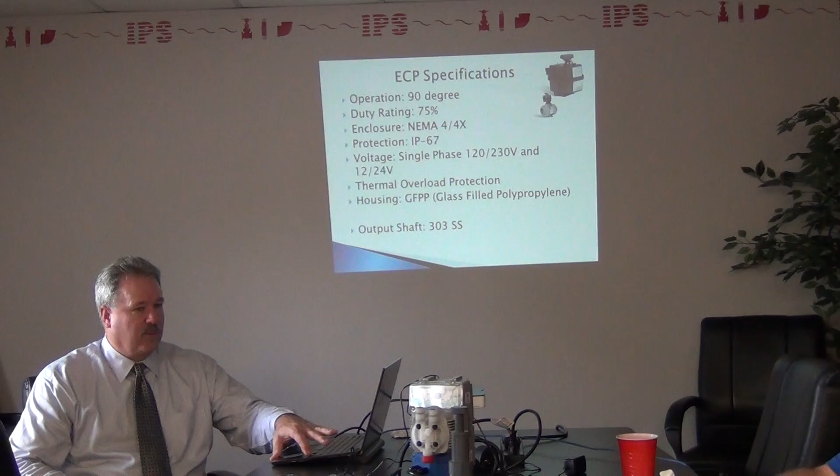And NEMA 4X. Anyway, our primary markets, as you may or may not know, are water, wastewater, industrial water treatment, chemical processing, process manufacturing, aquatic. We do a lot with aquariums, as well as waste treatment, plating and surface finishing, aquaculture, and offshore mining and fracking. Unfortunately, fracking's not doing too good right now, but fracking was a big part of our business as well. So, any questions so far?

I brought those bulkheads only because people don't know that we actually have two different types. We have one that's an extended style. You can see that's the same bulkhead, except that one's got a longer thread. So some people like to have the longer buttress threads, some like the shorter ones, but I just wanted to make sure people were aware of the fact that there are two different types. So you got a longer style or a short one.

So what makes ours different than, say, Spears or anybody else's out there is our left-handed thread. And why it's important, and I don't know why they don't do it that way, but when you actually thread a piece of pipe into that thing, it tightens it up more. Whereas if you do it in somebody else's bulkhead, it loosens it. And if you loosen the bulkhead, it's tough to get inside that tank to tighten it back up. Somebody has to hold it from the inside to tighten it up. So you definitely don't want to loosen a bulkhead accidentally on a big tank.

And we actually sell a lot of bulkheads. I mean, my region alone is probably one of the biggest sellers. It's kind of silly, but it really is.

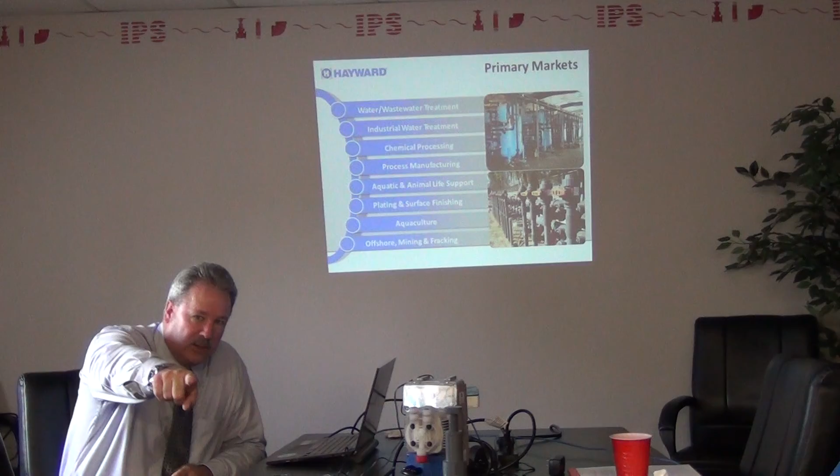All right, and then there's another product out there. There's an angle valve, and I got a needle valve that's over there. Just a few other little products in case you didn't know we made them. We have angle valves that are like needle valves, and then that small one you got in your hand right there. People call them lab valves, lab cock valves, and it's just a 1/4-inch valve, but it comes with all the different types of configurations, like male thread, female thread, barbed. It all comes packaged into one, and it's a good 1/4-inch valve.

Does it matter what side goes inside the tank? It does matter which side. That flange piece would be on the inside of the tank. Now you can get that, by the way, with a thread on the inside too. So if somebody wants to have a stand pipe that goes inside the tank, they can get that with a thread on the inside as well. So you can have a thread on the outside and the inside, or a socket. I can't tell from here if that one's a socket. Yes, somebody can glue something in there too. And the gasket itself should always go on the inside of the tank, not on the outside, just in case that ever gets asked.

So you do sell a lot of them around here? Well, not specifically around here. These are pretty good territories. I cover from basically Virginia to Long Island. All the big tank manufacturers, like Poly Processing and Snyder tanks, are the only people that we sell directly to, and they all use these bulkheads. The only reason we sell them directly, and they did that long before I started, is because a lot of people were trying to get that business directly themselves.